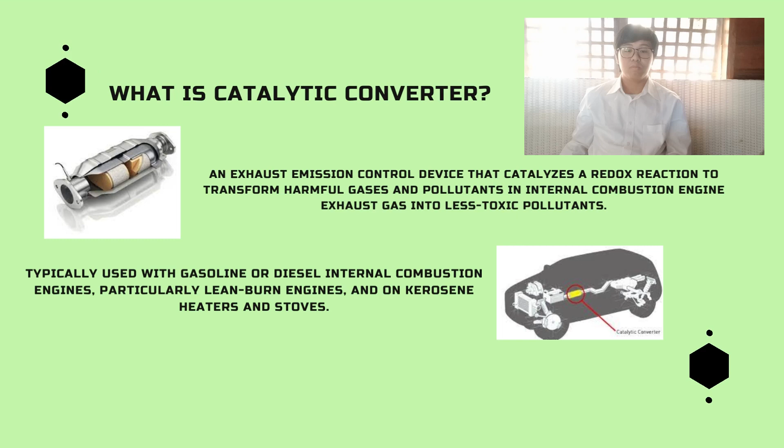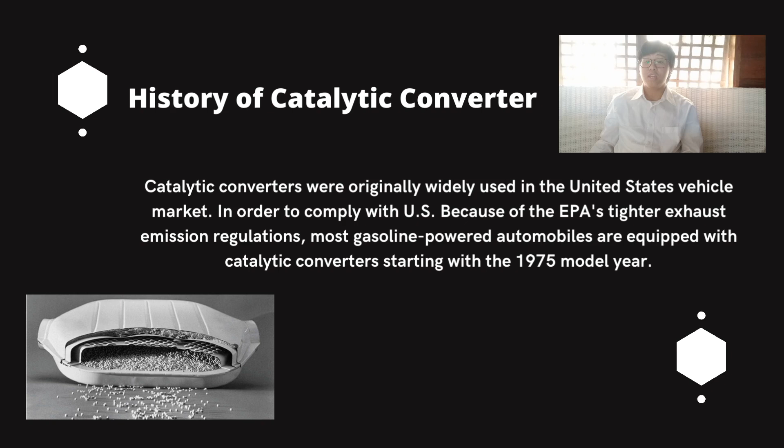The first widespread introduction of catalytic converters was in the United States automobile market, to comply with the U.S. Environmental Protection Agency's stricter regulation of exhaust emissions. Most gasoline-powered vehicles starting with the 1975 model year are equipped with catalytic converters.

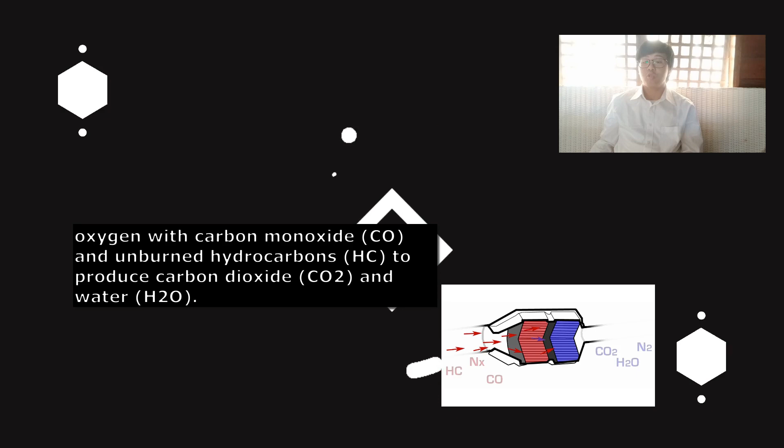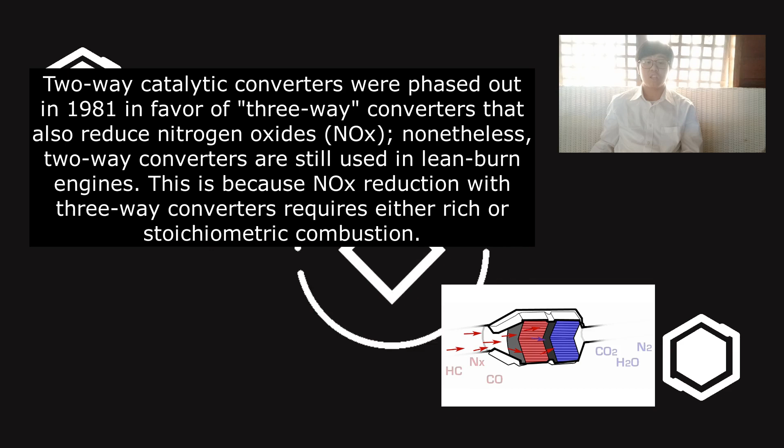These two-way converters combine oxygen with carbon monoxide and unburned hydrocarbons to produce carbon dioxide and water. In 1981, two-way catalytic converters were rendered obsolete by three-way converters that also reduce oxides of nitrogen. However, two-way converters are still used for lean burn engines, because three-way converters require either rich or stoichiometric combustion to successfully reduce NOx.

Although catalytic converters are most commonly applied to exhaust systems in automobiles, they are also used on electrical generators, forklifts, mining equipment, trucks, buses, locomotives, motorcycles, and ships, and even on some wood stoves to control emissions. This is usually in response to government regulation, either through direct environmental regulation or through health and safety regulation.

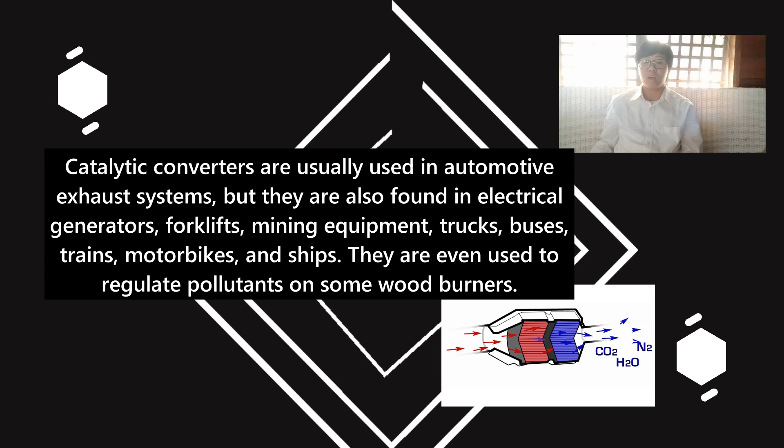What's the use of a catalytic converter? A catalytic converter uses a chamber called a catalyst to change the harmful compounds from an engine's emission into safe gases like steam. It works to split up the unsafe molecules in the gases that a car produces before they get released into the air.

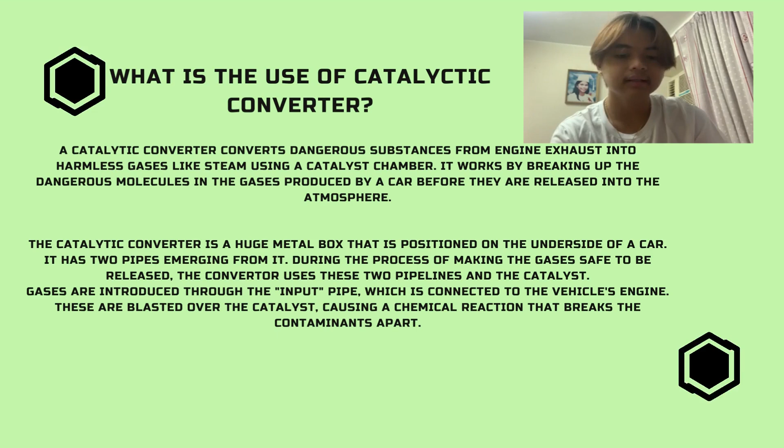The catalytic converter is located on the underside of the vehicle and looks like a large metal box. There are two pipes coming out of it. The converter utilizes these two pipes and the catalyst during the process of making the gases safe to be expelled.

Gases are brought in from the input pipe connected to the engine of a vehicle. These are blown over the catalyst, which causes a chemical reaction that breaks apart the pollutants. The less harmful gases now travel through the second pipe, or the output, that is connected to the car's tailpipe.

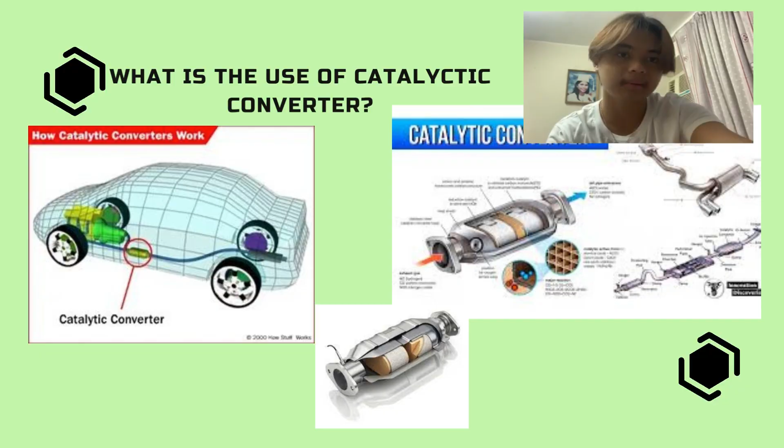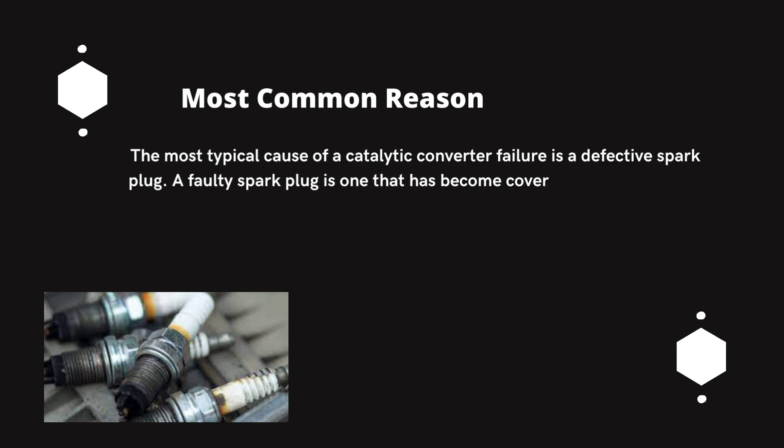If there's too much pollution coming out of your tailpipe, your check engine light will come on. The most common reason for a catalytic converter to fail is because a related part fails, most often a faulty spark plug. A bad spark plug is a plug that has become covered with a substance like fuel, carbon, or oil, or one that is blistered from running too hot.

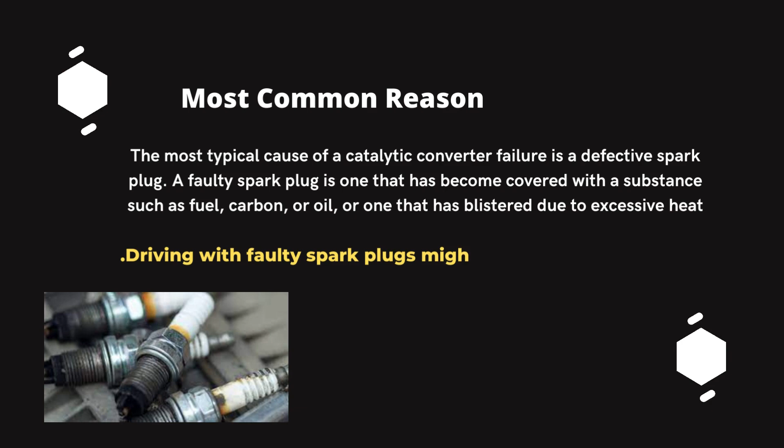Driving with a bad spark plug can cause a host of problems for your engine. Here are some signs of catalytic converter issues. Number one: if a catalytic converter becomes clogged, it can reduce the amount of airflow through your engine, which means your engine might start to burn more fuel than usual, resulting in a noticeable drop in fuel efficiency.

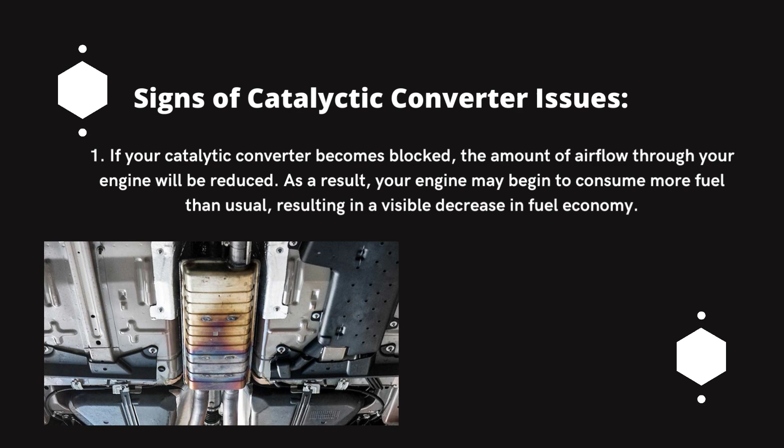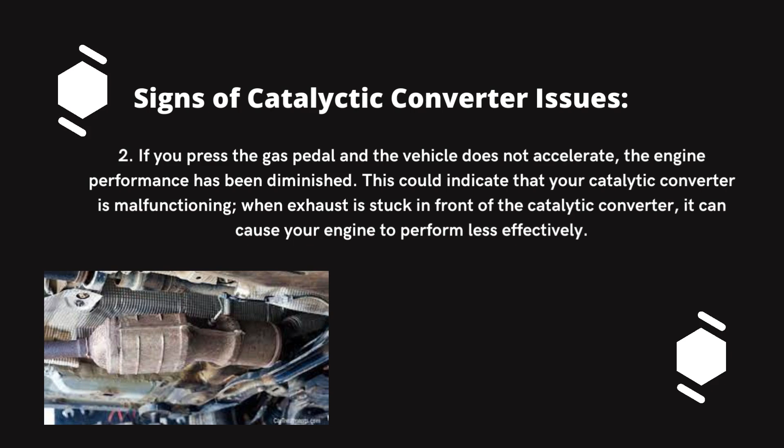Second, if you push your gas pedal and you don't go faster, this means reduced engine performance, which also means there might be something wrong with your catalytic converter. When exhaust gets trapped in front of the catalytic converter, it can cause your engine to run less efficiently. And last but not least, your vehicle has problems starting.

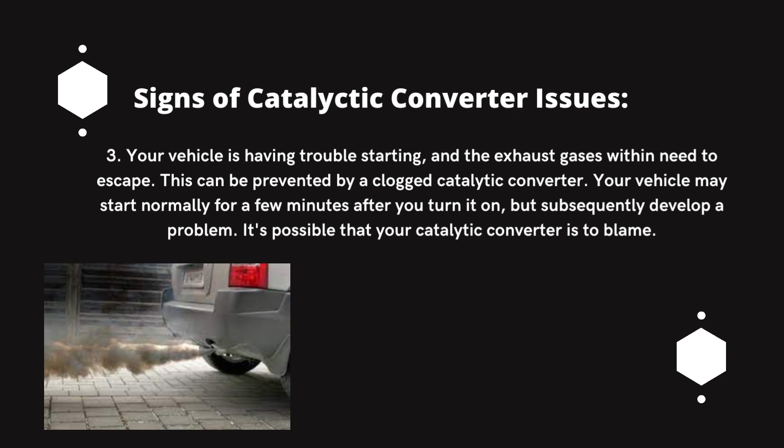The exhaust gases in your vehicle need to escape. A clogged catalytic converter can prevent this from happening. Sometimes your vehicle starts normally for a few minutes after you start it, but then it starts to have a problem—it could be because of your catalytic converter. Those are just some of the signs of catalytic converter issues.

Taking your vehicle for an occasional highway drive for 15 minutes or more is one of the many ways to prevent damage. This will allow the exhaust to sufficiently heat up and burn off all the deposits that have built up in your catalytic converter.

I have here two methods to fix catalytic converter issues. First, the replacement option. When the failure is detected, the catalytic converter should be replaced as soon as possible. This is required since it increases the emission of toxic substances into the atmosphere and can affect the performance of the vehicle. There are several options for solving the problem with a faulty catalytic converter. Replacement with an original part is an expensive but reliable option since it has a long service life.

Number one, installation of a versatile model: it does its job perfectly and can be purchased at an affordable price. Number two, removal of the catalytic converter and installation of a flame arrestor: in this case, reflashing of the onboard computer is required, but this method ensures long-term operation of the part.